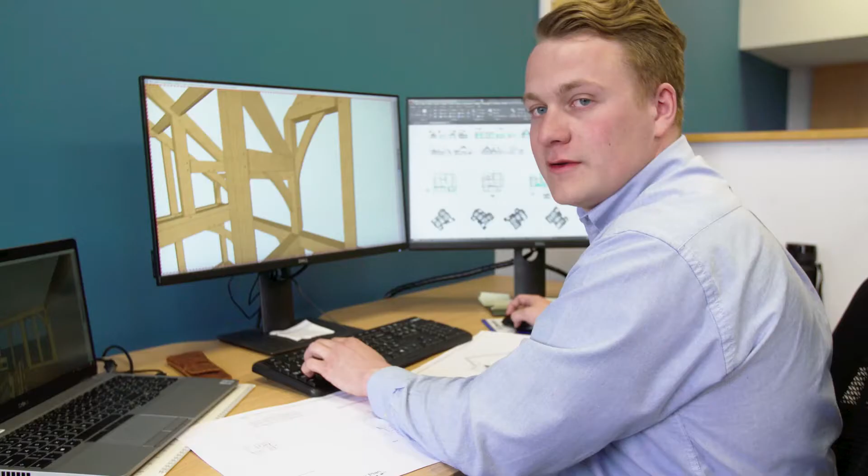The beauty of designing the oak frame and putting the joints in within this software is that we can actually go inside the timbers. We still look around and go, nah, is this really our house?

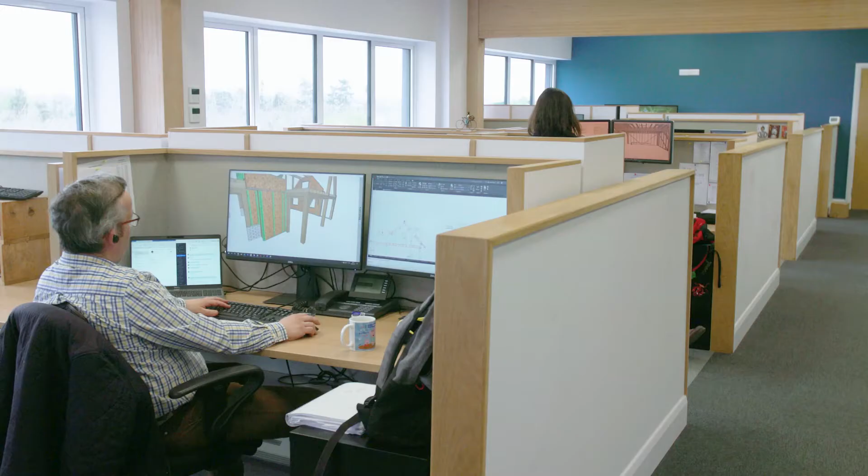To explain all about frame design, I have with me today Alex Knowles. Alex has now moved on from designing oak frames to teaching the new younger designers.

I'm an oak frame and encapsulation designer. I've been here coming up for 4.5 years now. I spent 5 months in the oak frame workshop and 1 month out on site, and then I was shipped off straight to Germany to learn the software which we use to design our oak frames in.

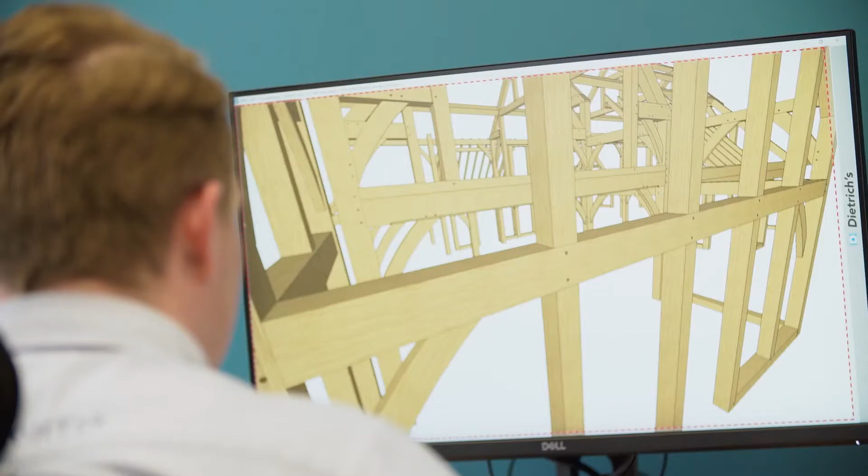On average per designer we're probably working on about 5 to 8 projects per year, and we have around 15 to 16 designers, and these jobs can take anything from 3 months up to sort of 6 to 8 months depending on the size of the house and also wanting to fulfill the client's expectations.

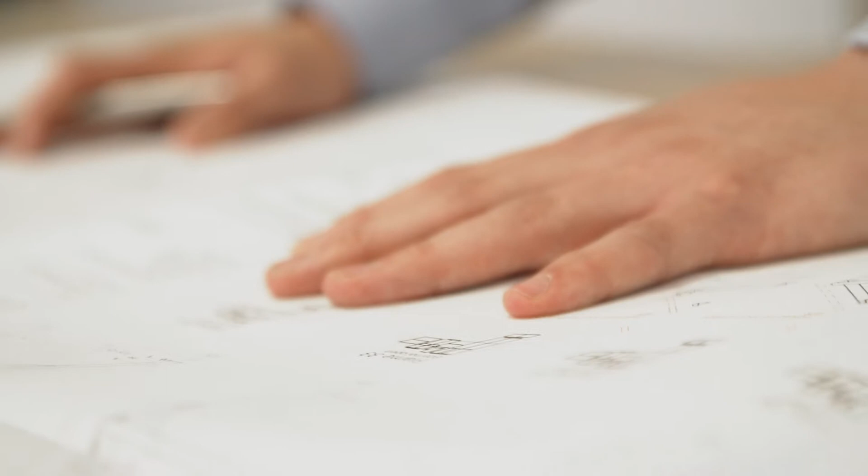The oak frame journey in the design starts with the architectural department, and we then link together after the planning has been approved, and we start bringing what they've put together in their 3D model to life in our one-to-one scale software.

The key thing to remember is that not only do we have the pre-manufacture in the workshop behind us, which obviously speeds up the site process, but we also are pre-manufacturing the house in our 3D model to a one-to-one scale, so this really does save a lot of time.

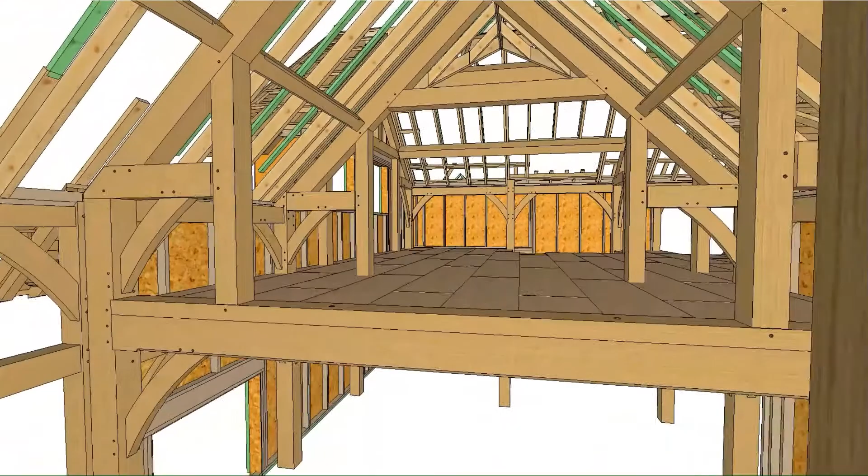The beauty of designing the oak frame and putting the joints in within this software is that we can actually go inside the timbers where we've got multiple timbers coming in. We can pre-plan where the mortise and tenons are actually going to be.

So with the press of a button, we can see inside or through, and then we can also go up into the timbers and see where it all meets.

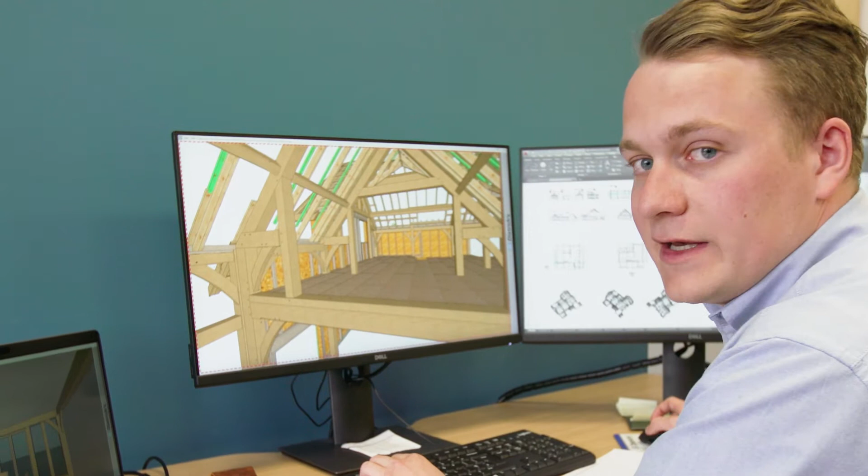As you can see here, we have our oak frame design and also an encapsulation design in the same 3D model. All of the construction of the wall system and the oak frame, and we can make sure that all of the areas meet together.

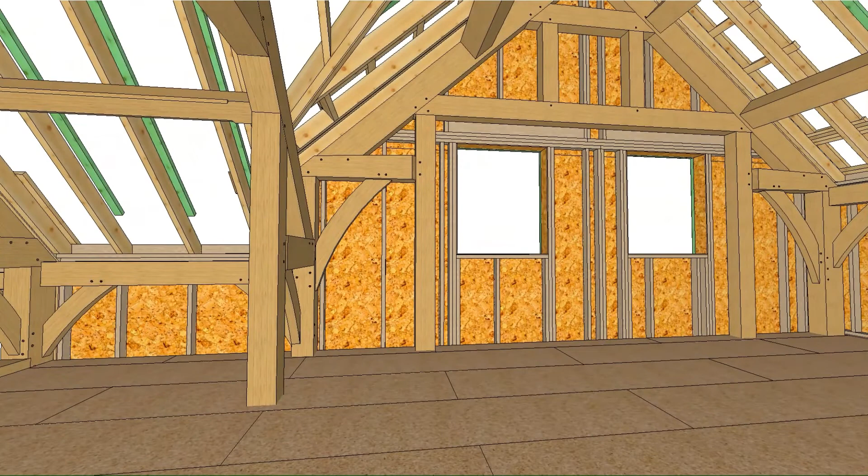This is also where we divide the panels into the sizes that we're going to send them to site in. So you can see we create all of the window openings, the structural openings.

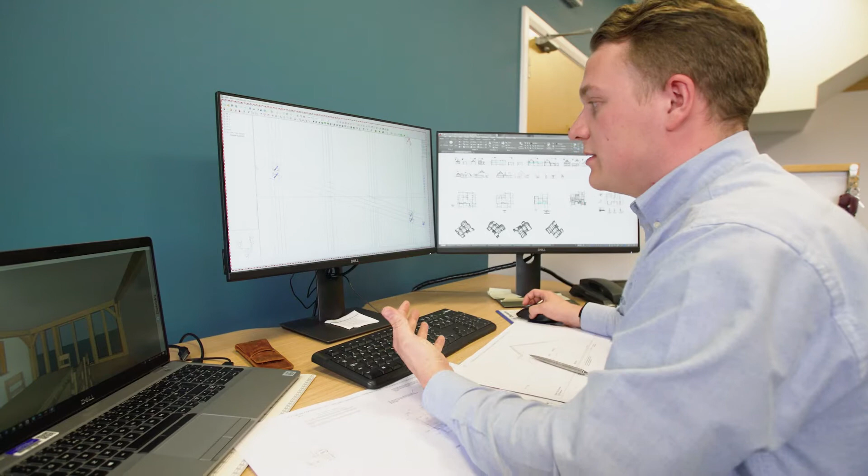It really is as quick and as simple as pressing on the timber that you want to create the tenon from and pressing on the timber that you want to create the mortise from. And you can see, there we go, there we have it.

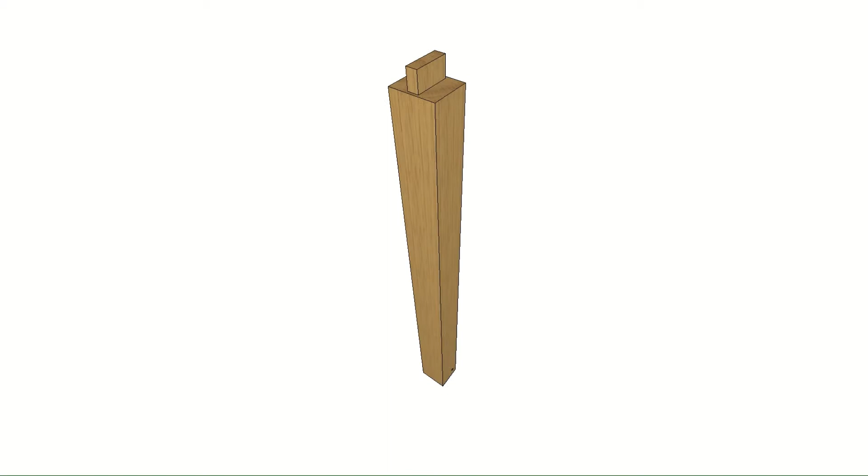If we then view this in the rendered software, you can see that this timber and this post now has a tenon cut on it as quickly as that. Quicker than the machine's going to do it, but also then a lot quicker than a human would be able to cut it.

So this is the 3D model which we'll present to the clients, and as you can see we have all of the external elements, the brickwork, the weatherboard, the tile finish on the roof.

We also have the joinery and our very own face glazing system, so we can walk them around the outside of their house, and as I say, it's the first time they're seeing the house in a one-to-one scale.

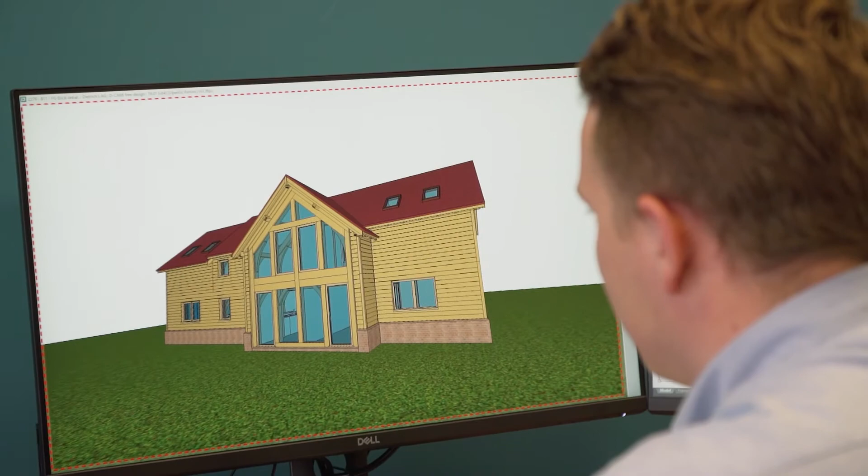Then once we've been around the outside, we'll go inside the front door, go through each room, go through each floor, looking at how the oak frame interacts with the internal walls, the kitchen, the stairs, everything that's going to be inside that oak frame home.

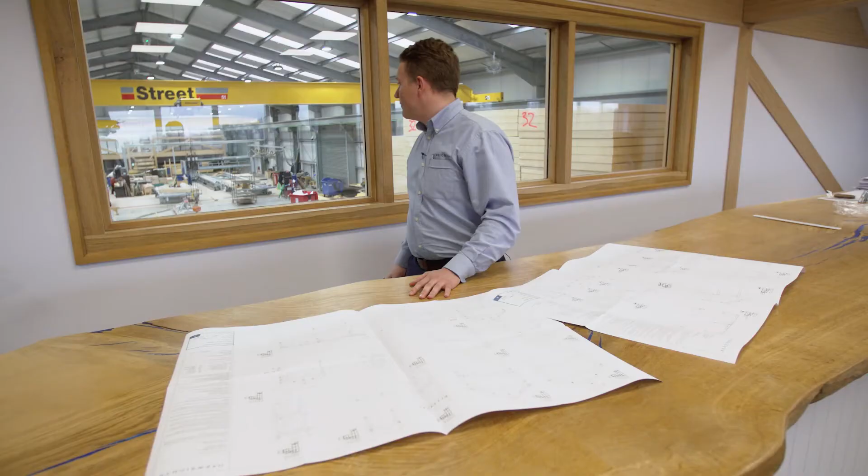As well as you can see in the background, we have this big window which opens up into the factory, so it's really good to be so close to the manufacturing of the panel systems and the oak frame that we build.